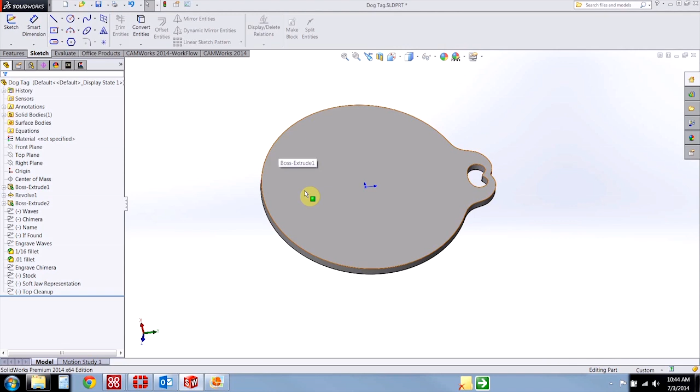And then I need to flip the part over, and because I've already cut the profile of the part, I need to have a fixture that's actually going to grip around the outside of the part for me in order to do some of this 3D work and some of the engraving on the top face. So when the part is in the fixture, it's going to look something like this.

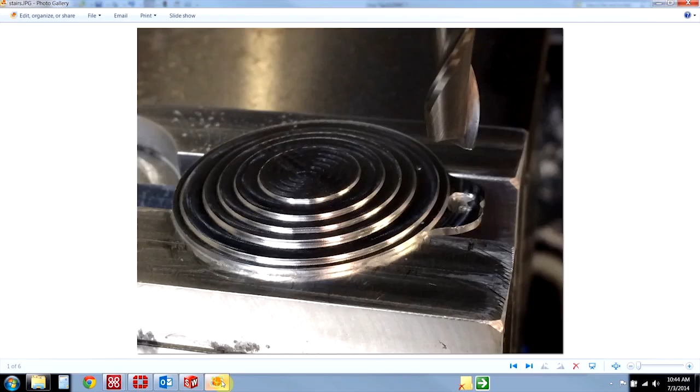Notice that the jaws here have that nice circular profile cut out into them. And that allows me to grip the part with the most surface area possible in order to get the best grip on this very, very thin wall here. So let's dive right in.

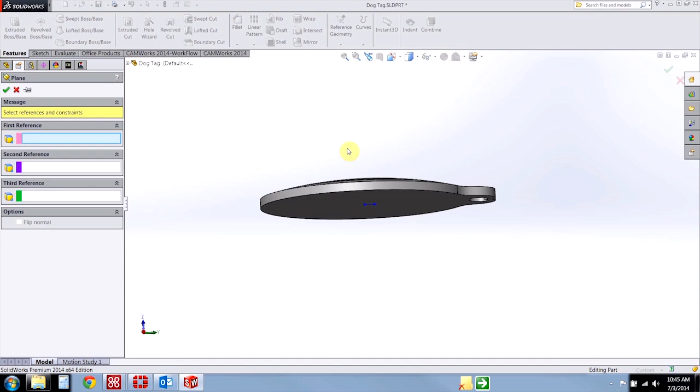On the SolidWorks FeatureManager design tree, I need to do a few things. First of all, I need a reference plane that's going to define the depth that this part is actually going to sit inside those jaws. So let's define a new reference plane off of the bottom face. This part is 60 thousandths thick, and I want to leave about 10 thousandths clearance. So let's use a 50 thousandths offset from the bottom face.

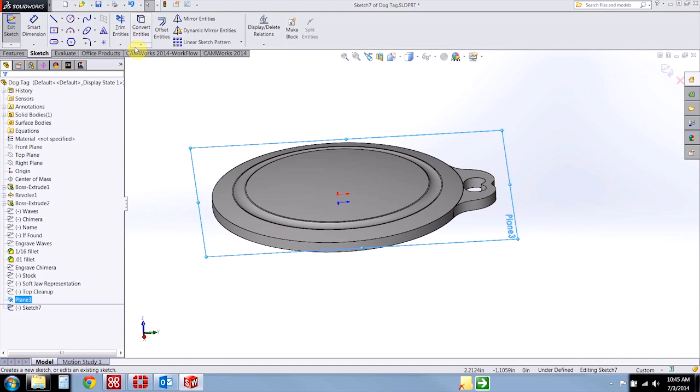And on that new plane, I'm going to sketch the profile of the part. Now, there's several ways you can do this. You can use the convert entities command. You can sketch the profile yourself. Another really effective method is to use the intersection curve command. What that will do is it draws a sketch entity everywhere where the faces that I select intersect the plane that I'm sketching on. So there we have it. We'll exit that sketch, and I'm going to call this my soft jaws.

I'm also going to need a sketch that contains nothing but a circle that is centered between the front and the rear jaws, because when I'm machining this part, I want my XYZ zero to be located such that I can touch off the top face of the jaws for my Z0, and then I want my Y0 to be centered in between the two opposing faces of the jaws. So let's sketch that out.

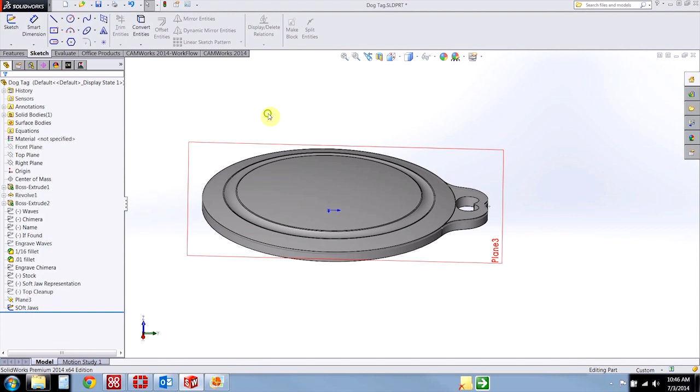So I have a new sketch on plane 3, and in this case the origin works out for me, so I'll just sketch a circle right there. And my Z0 is going to be on that plane, so that's why I chose this plane for my sketch. And this is going to be my soft jaws origin.

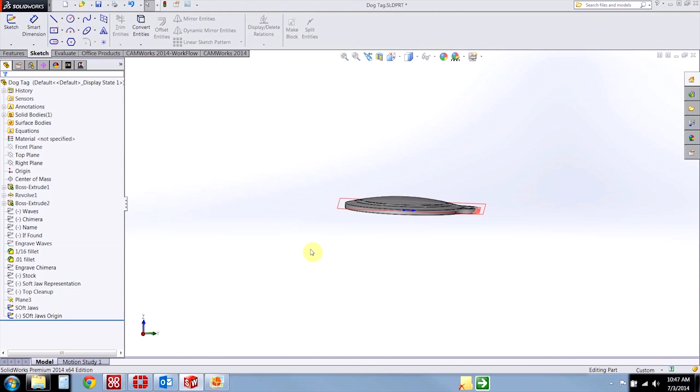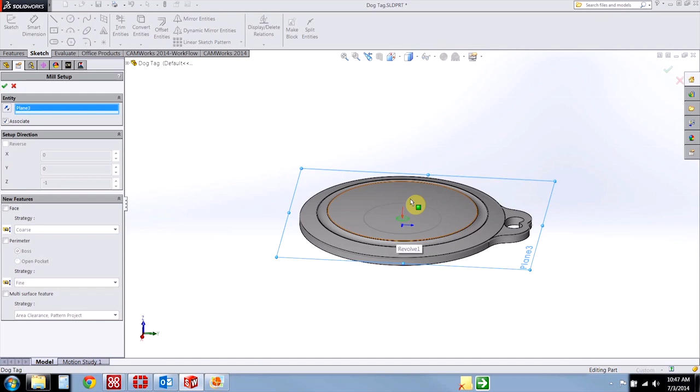So I'll switch over to CAMWorks, and I'm going to define a new configuration. I do this just to keep the programming data for my fixture separate from the programming data for my part. We'll define a new setup off of that new plane that I selected. We are in fact machining in the downward direction. And I'm going to take that profile that I sketched, and I'm going to define a pocket feature using it.

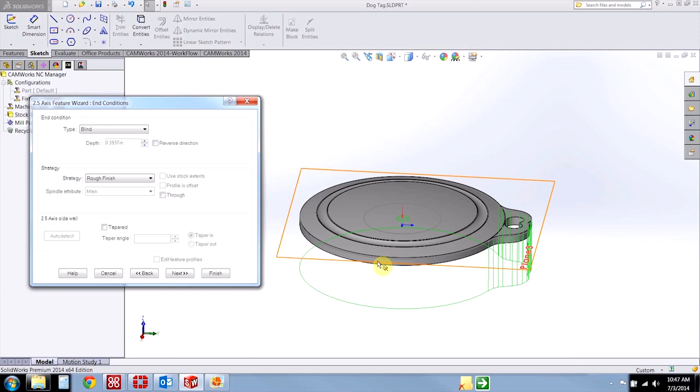So notice that's really all the trick is. Instead of cutting the outside of the profile, we're going to cut the inside of the profile. So that means instead of using an open pocket or a boss, we're just using a pocket feature in this case. Alright, this pocket's going to be going up to that bottom face, and that's all there is to it.

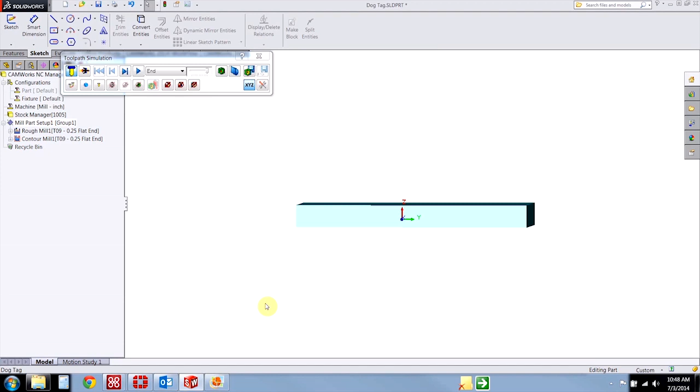We can now generate our operation plan, generate our toolpath, and keep in mind that the simulation is not accurate because my stock is not going to look like this. I'm actually not going to have any stock above my origin. Just like we see in the photo here, we're not going to have any stock up in that direction. We're touching off on this jaw right here, and the part is not actually going to be in place at this point.

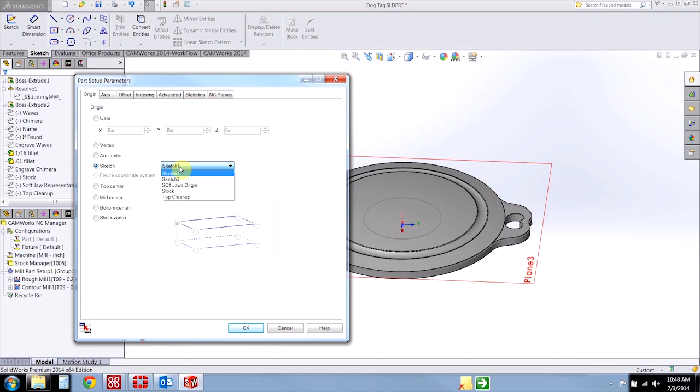So let's verify our origin. We'll double click on the setup. We'll go to our origin tab, and we're going to use that sketch that I defined for my origin. Make sure my axes are pointing in the proper direction: X going to the right, Y going up, just like we do in the picture. And you can define a work coordinate offset.

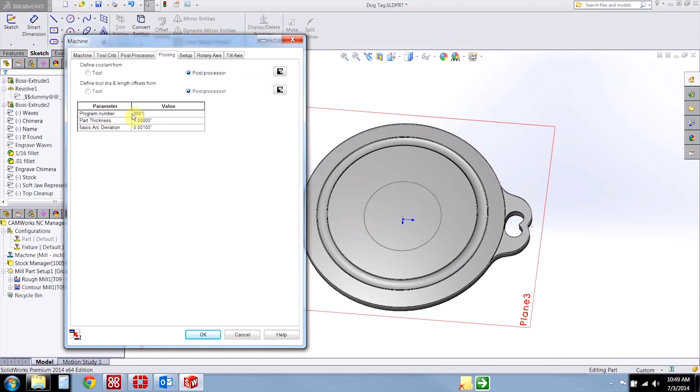And lastly, you may want to define a program number that you use for soft jaws. Personally, I like to use 0001. And that's all there is to it. I'm ready to post out my code and go machine my soft jaws.